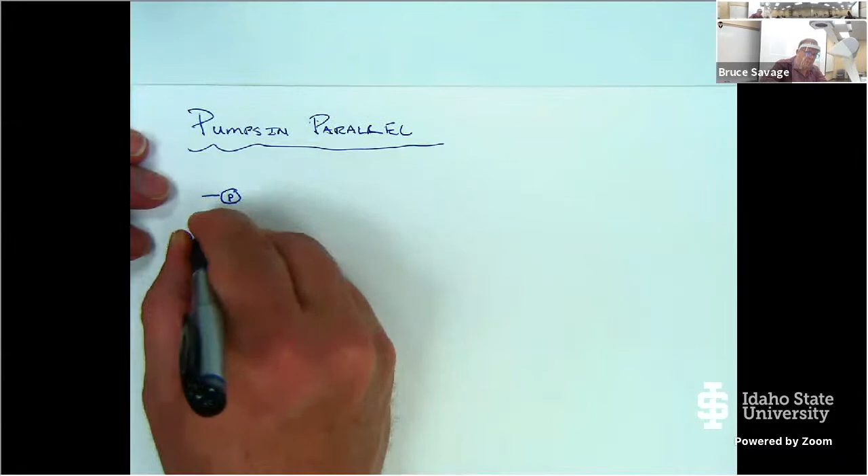Okay, yeah, so in other words, we're going to be doing pumps in parallel and pumps in series. And pumps in parallel, this used to be a whole lot easier back when civils had to take the electrical engineering course, which we no longer require because we've had to cut back the number of credits, and we talk about electrical circuits, but you may have seen it in physics. I have a pipe coming in to a pump and another pump, and then these two pumps come together and go to my system.

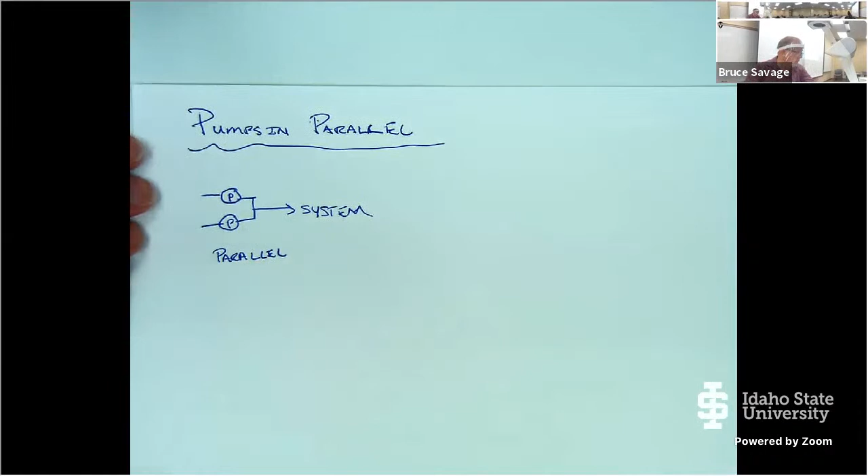This then, this is parallel. Okay. So, well, I want to ask this question to you guys. What is the obvious thing that we are doing with this versus one pump? When I say the obvious thing, if we're saying that the important things with pumps is the head and the flow rate, okay?

Relative to, so this system relative to that system where there's only one pump, which do you think is the most important criteria, the head or the flow rate? Or which one is affected the most? Let me say it that way. So once again, the two most important variables dealing with the pump are the head and the flow rate. If we have pumps in parallel, which one do you think is affected more, the flow rate or the head?

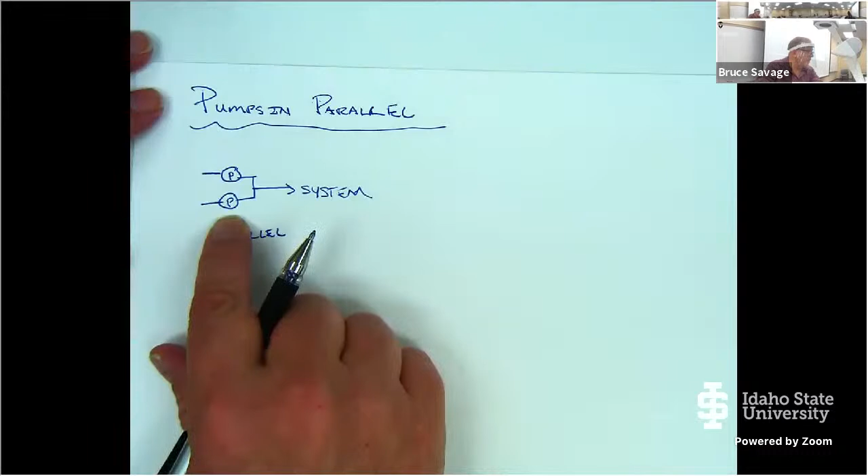Does this pump, does pump A, I'm going to call this A and this is B, does pump A know that pump B exists? It doesn't, does it? Now the system does. The system, when you add the flow to both, the system does. But that therein lies the key. I now have two suppliers to the system, two suppliers that are trying to give flow to the system. All right? So if they are supplying flow, now I have two people that's trying to bring flow to the system. So I probably did a terrible job of leading you down that path, but the goal I was trying to make here is that parallel pumps add flow.

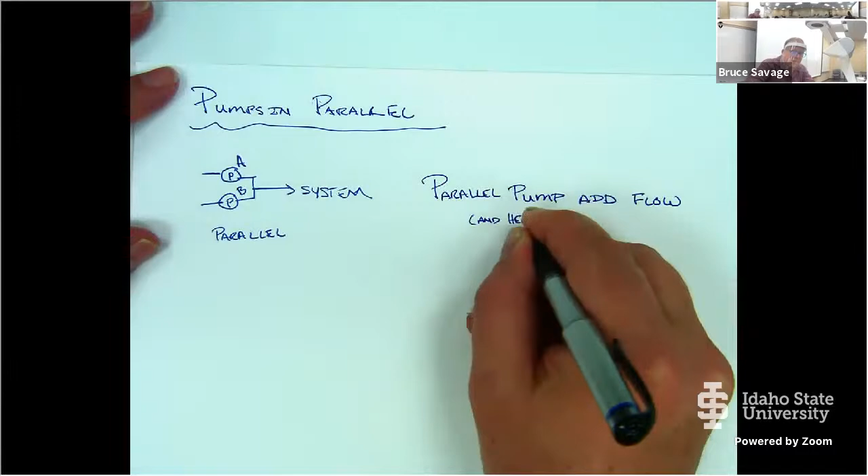My main goal here is that parallel pumps add flow. So if I'm in a system and I need more flow, and I don't necessarily want to change out my pump for a bigger one, there could be reasons why I don't want to do that. Two small pumps offer a lot of flexibility. They offer the ability to turn one pump on when I need it, turn two pumps on when I need more flow, and vice versa. So it offers a lot of flexibility. Or turn two pumps on all the time, and if one pump goes out, no big deal. I still have one pump, so I can at least get part of the flow.

So there's a little bit of a safety factor there, albeit at a lower flow rate. But there is... what's the word? Redundancy. Okay, there is a little bit of redundancy in my system.

If I absolutely need that higher flow rate, then I may put three pumps in and rotate between them if I always have to use two of them. The pumps in parallel add flow. So if you can burn that into your brain, it's going to help you solve this problem.

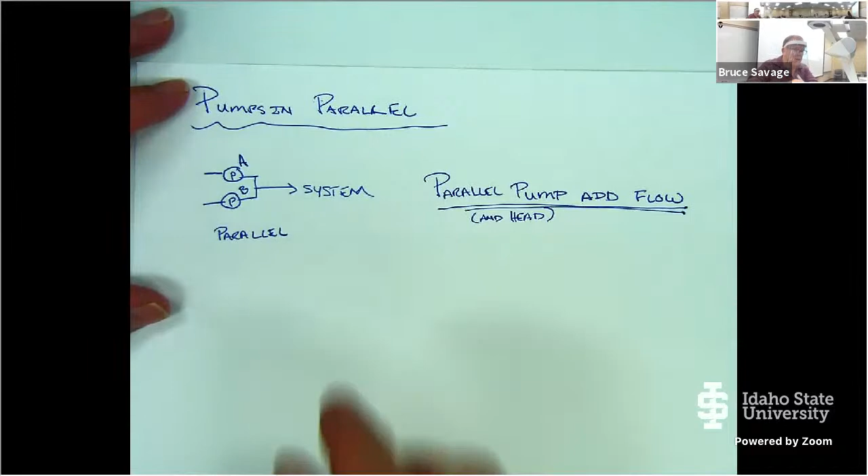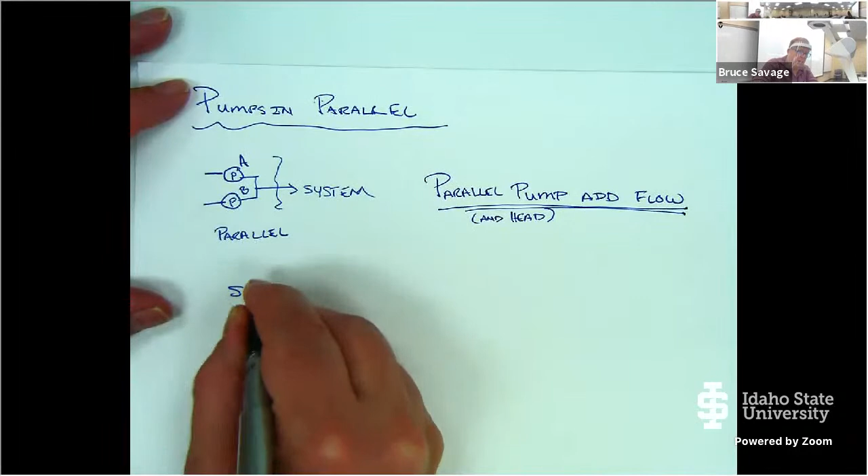Because our system curve does not change. After this, the system knows that there's flow coming to it, but it doesn't know that it's supplied by two pumps, or by three pumps. It just knows that there's flow coming to it, okay. So the system curve does not change.

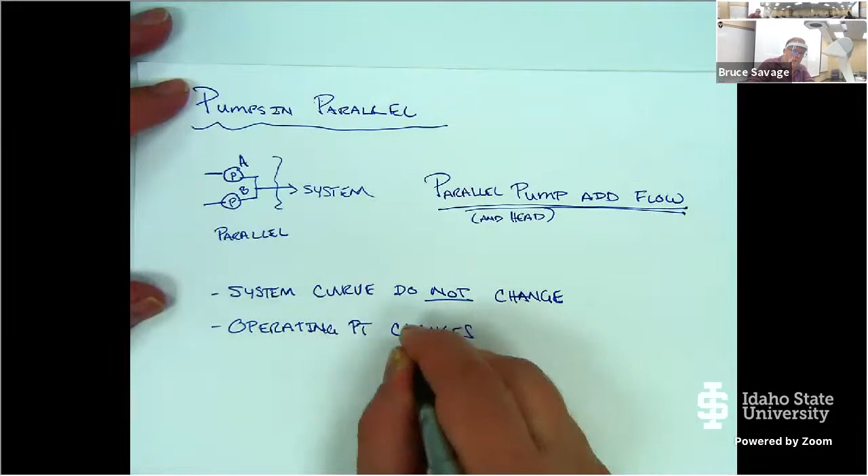The operating point changes. Okay, so the process, we add pump curves horizontally.

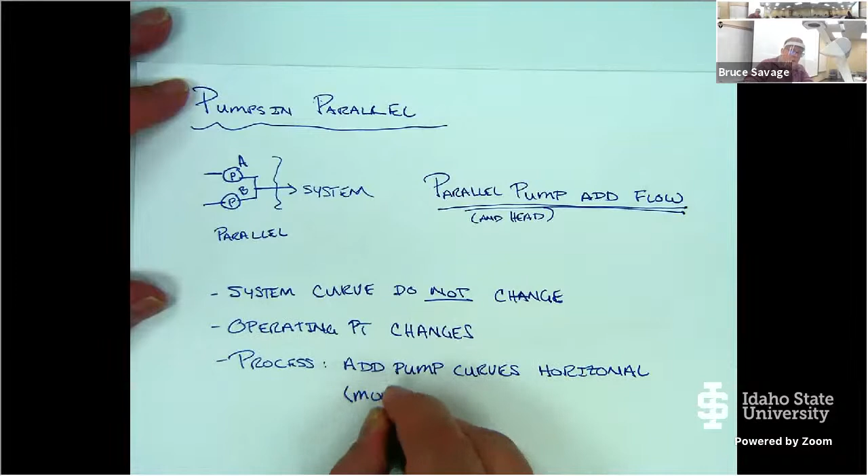More flow. So this is the concept, and I'm trying to tell you that pumps in parallel add flow. So you should say to yourself, oh, I'm going to add flow, so I'm going to go out on the x-axis. And we use then the principle of superposition.

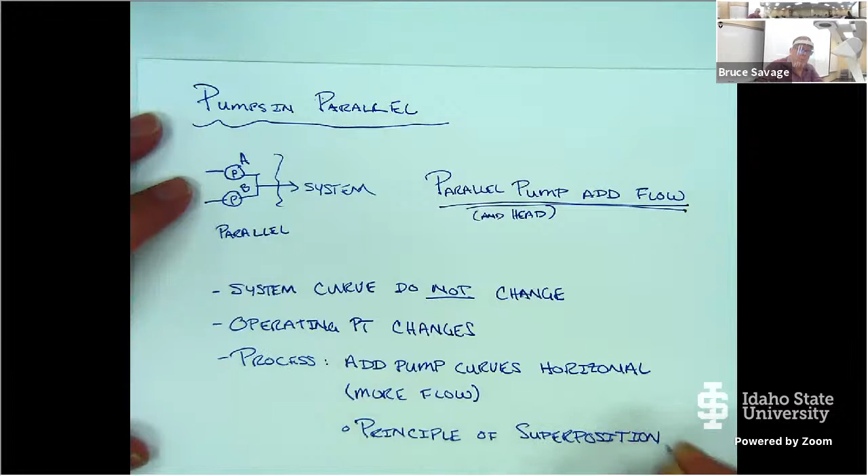You guys familiar with the principle of superposition? You should have seen it in probably structural analysis, sometimes in hydrology when you're dealing with groundwater. In other places in engineering, the principle of superposition means that we just add them together, right?

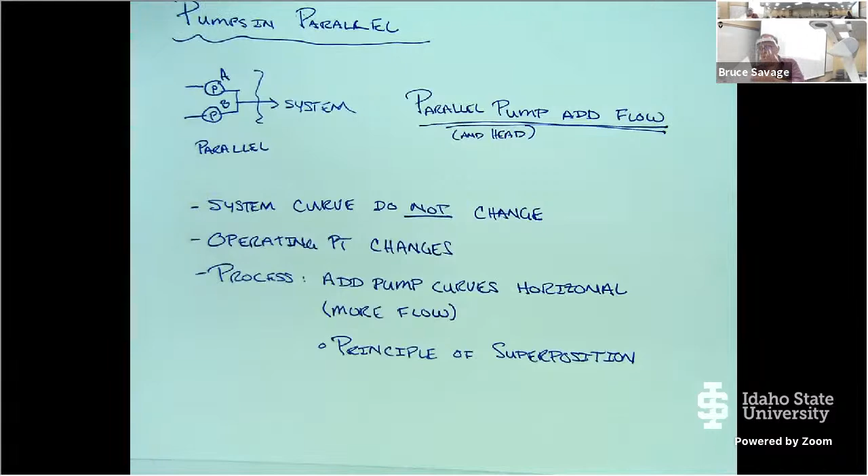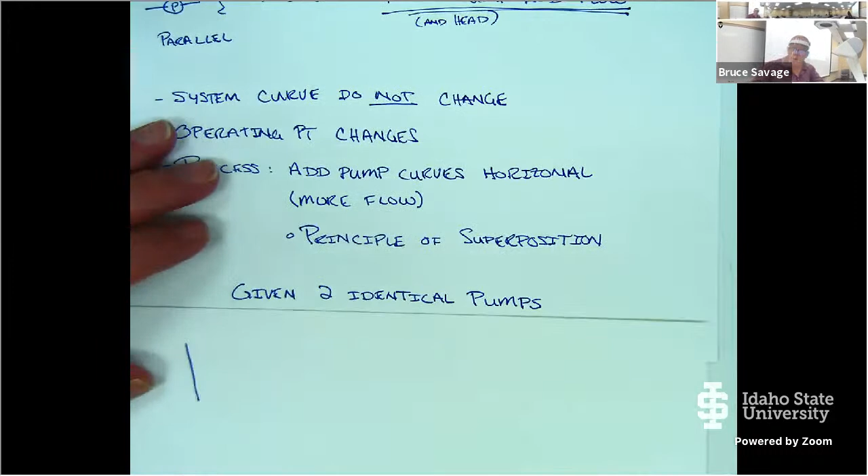So what this tells us is that if I have pump... okay, let me finish this out here. Say given two identical pumps, two pumps that are the same model, same motors, everything. So given two identical pumps, I then can take the one pump curve, so pump curve A,

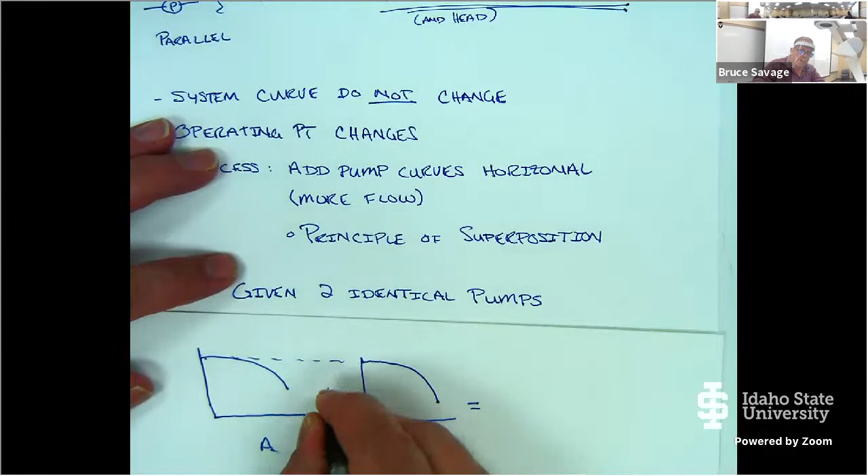and pump curve B. I'm going to try and draw them the same the best that I can. And now when I add those two together, then I'm going to get pump curve A plus B. I'm going to use a little line here to represent the head. I didn't draw those too well, but that represents the shutoff head.

So I'm going to draw pump curve A, and then I'm going to come in and add pump curve B. And that was terrible, I should have used my erasable pen. It should be up to here. All right.

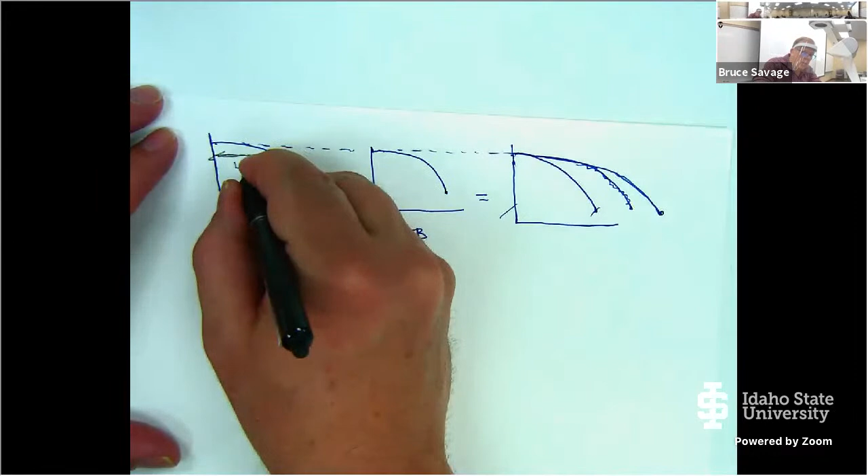Here's the concept. If I have this distance right here as L, call it L1A, and over here at the same height, I have L2A. What's the relationship between L1A and L2A? They're the same, okay. So now I'm just going to come over here to my combined pump curve. I'm going to put in L1A, and I'm going to come in and put in L2A. For similar pumps, same size and everything, those distances are going to be the same.

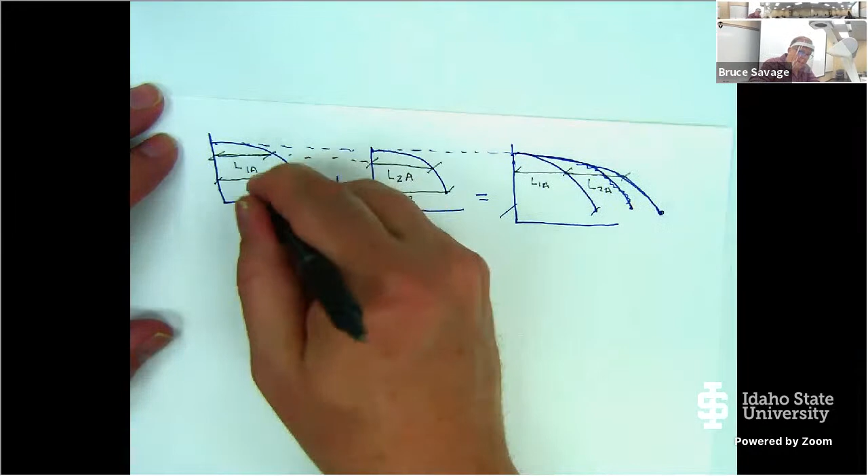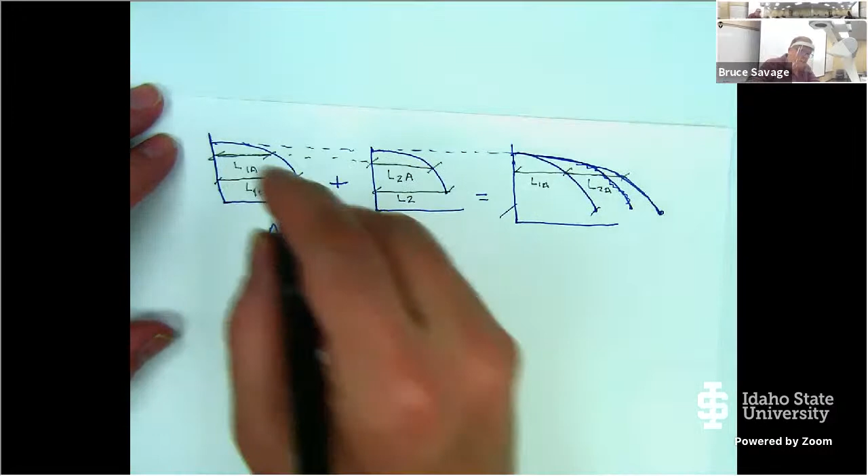And then I can also come down here to the bottom and put in L2A... sorry, the first one should be L1B, sorry. Monday, I'll blame it on Monday. L1B... oh, you've got those labeled as curve A and curve B, so wouldn't it be L2A? 2A, thank you, yeah, good thing someone's watching out for me. And over here, this is going to be L2B, right? And up on the top, that should have been L2B, L1B. Ah, how about I just go home and go to bed? All right, there we go. L1A, L1B.

And then L2A and L2B. I can put those in over here. Man, that was a terrible notation system there—I should have just called those A, B, C, and D, would have been a whole lot easier, right? Noting then that L1A is equal to L1B and L2A is equal to L2B.

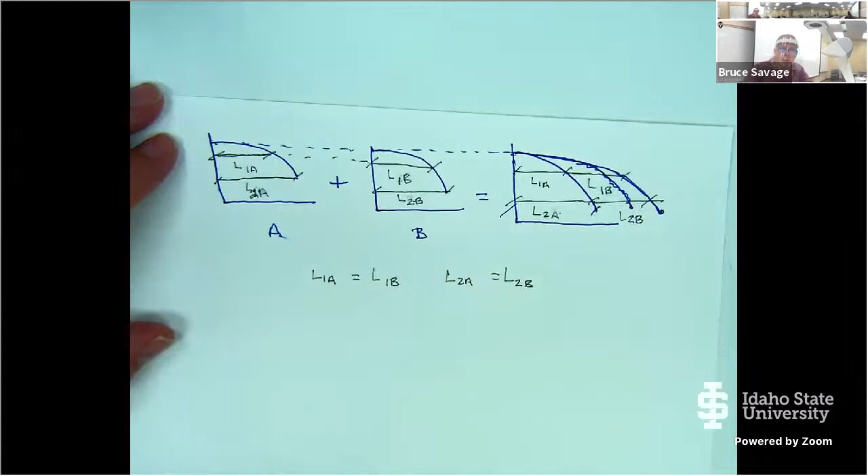Now, my little graph up here is pretty messed up, so I'm going to draw a new combined graph down here on the bottom. Make this bigger.

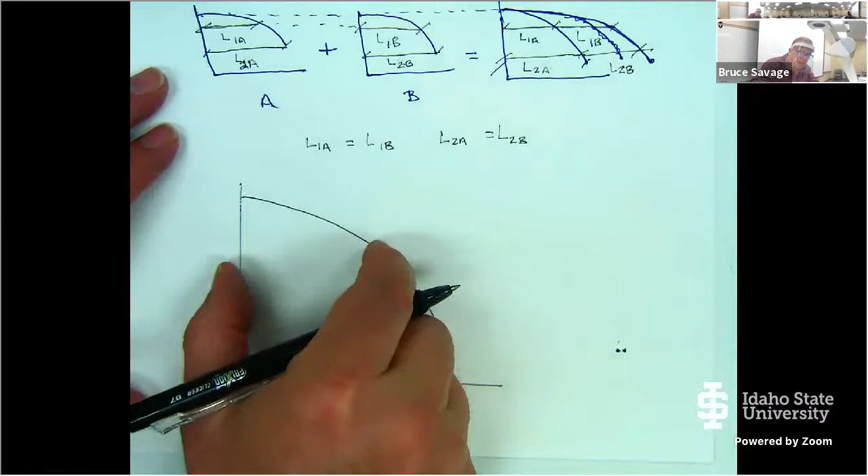All right, so if this is pump 1, just using my fingers here to measure approximate distance between each of those. So now I can draw my second pump curve. Of course, it comes back to the same spot because if you add 0 plus 0, you get the same value. So this is one pump. This is two pumps.

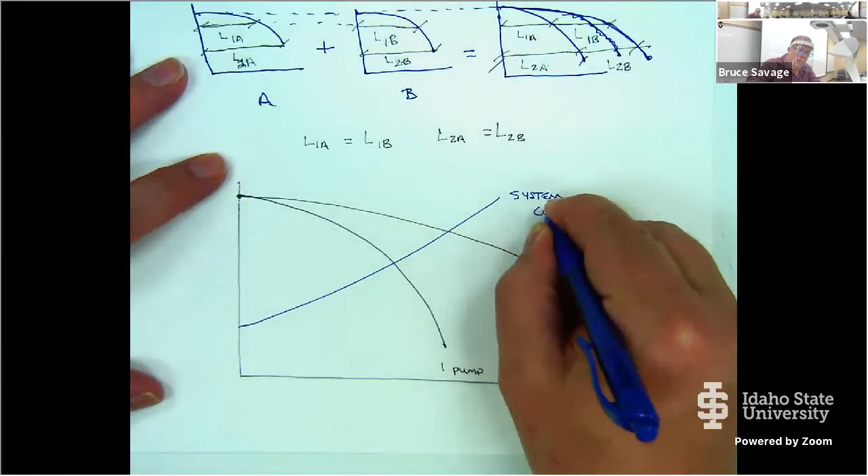Now, if I go ahead and put my system curve on, I'm going to draw a random system curve. Call this my system curve. And hopefully you can see that by adding another pump, my flow and my head increase, but it's mostly my flow that increases.

Let me bring my red pen today. My operating point—this here right here is going to be one pump. That pen's dead. One pump operating. And right here is going to be two pumps operating.

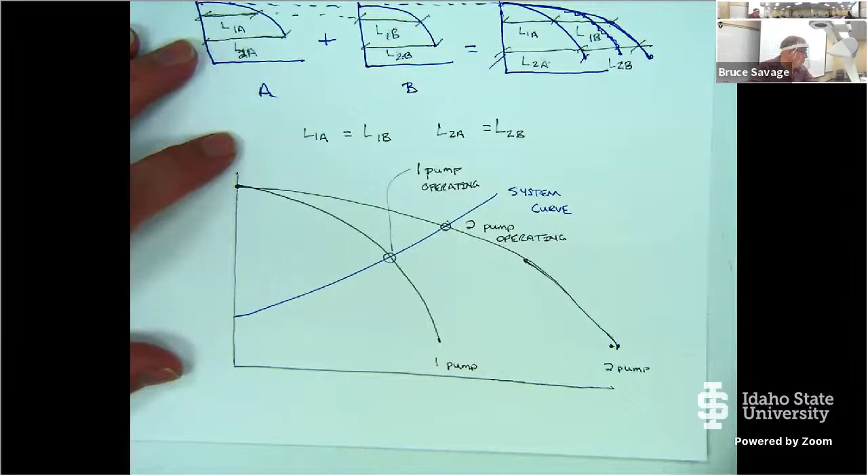So if I turn one pump on, it's going to operate right there. That's where the pump curve intersects the system curve. If I turn two pumps on, it's going to operate over here. Does this mean that the first pump is putting in this flow rate down here, and then the second one is adding to it? Does one pump know that the other one exists? It does not. And which pump would be putting in more? If they're the same pumps, wouldn't you expect them to put the same in? That makes sense, right?

So notice if I come back horizontally to one pump curve, now these two are essentially the same. So Q and Q, both of these pumps, since they're the same pumps, are going to put in the same flow rate because they're pumping against this head.

Since they're pumping against this head, each pump is putting in half of the flow. Because we're putting more water in our system, the friction losses go up. Our delta Z does not change—how high we're lifting the fluid doesn't change, but because we're pumping more water through our system, the friction loss goes up. That's why our system curve goes up, and that's why we don't double the flow from the first pump, but we do increase the flow. We don't double the flow because the friction losses go up. But each pump, since they're identical pumps, puts in the same rate.

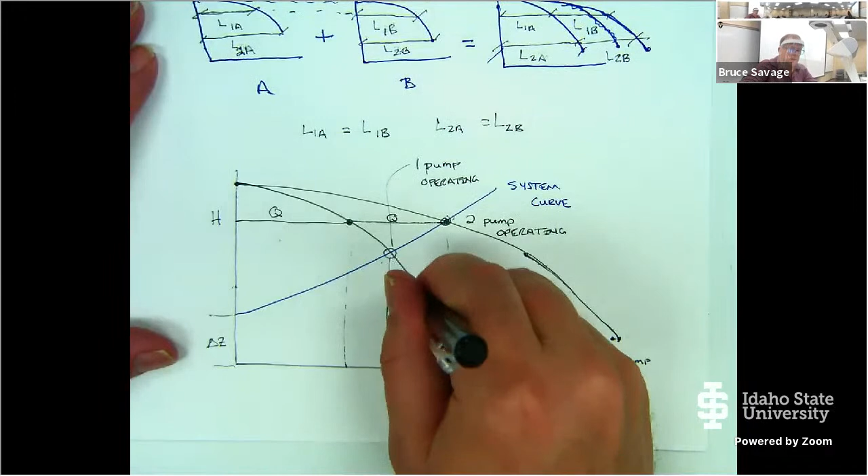So when we add those together, on a pump curve, we would go horizontally back across to get the flow rate for each one. It should be the same. At a given head over here, the distance from our y-axis to the pump curve should be the same distance as pump curve 1 to pump curve 2. Because that's the principle of superposition—add them together, as long as they're the same pump. As long as they're the same, that's the key. We'll look at dissimilar pumps probably on Wednesday, but as long as they're the same.

All right, now if I want to evaluate the performance of a pump, realizing that each pump doesn't know that the other one's there, what head are they operating at? This head right there, right? And this flow rate. So I would bring everything back to this point to evaluate my pump's efficiency and the net positive suction head.

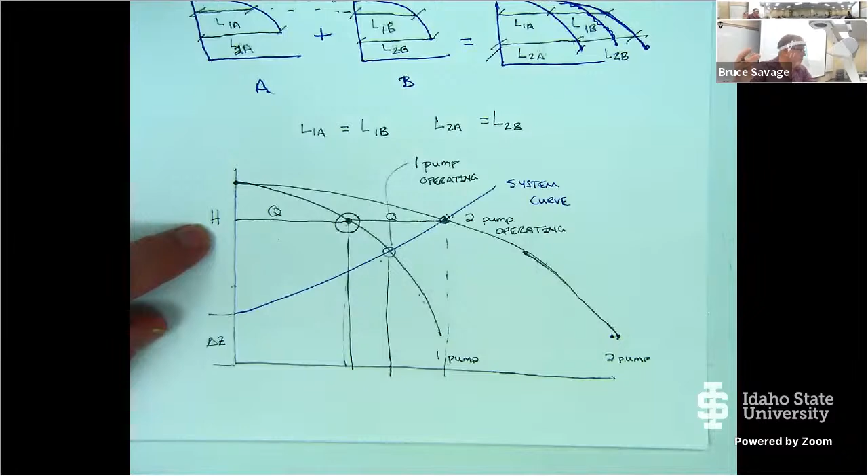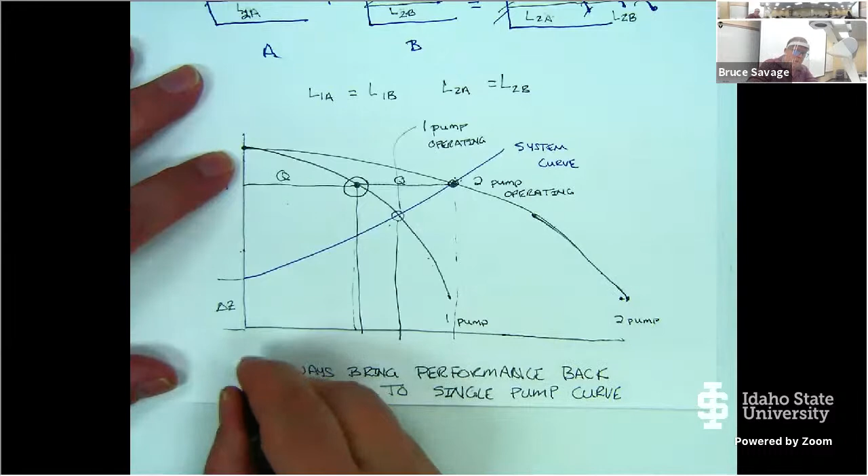So the key point here is always bring performance back to a single pump curve. Always bring the performance back to a single pump curve.

And because the pumps are operating at this head right here, we know that the flow is going to be half for each pump of the system flow. If the system has 100 gallons per minute, each pump is going to provide 50 because they're the same. And they pump against this head—that's all that pump knows. It knows it has to pump water against this head. It doesn't know what else is coming into the pipeline down system, but it knows if it has to pump at this head, this is where it's going to operate. This is my efficiency, this is my net positive suction head.

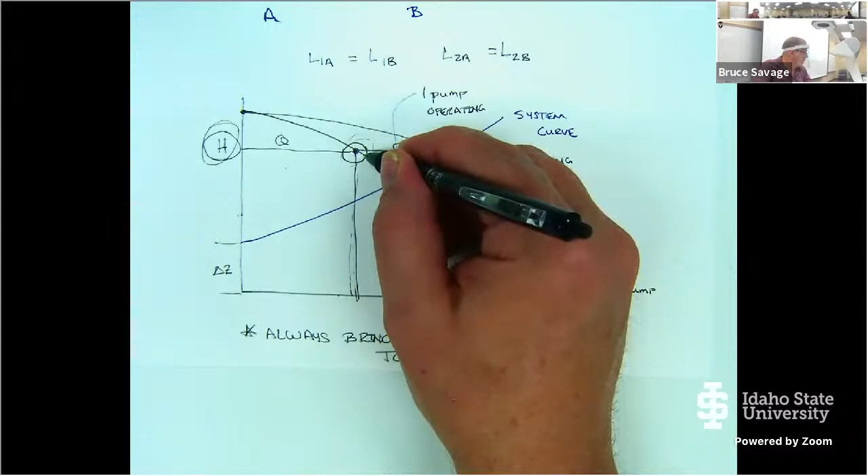Okay? Can you explain that again? So like, where is that relevant when you're doing a calculation that you would use that operating point? So this operating point is the operating point for a single pump in a system with two identical pumps in parallel.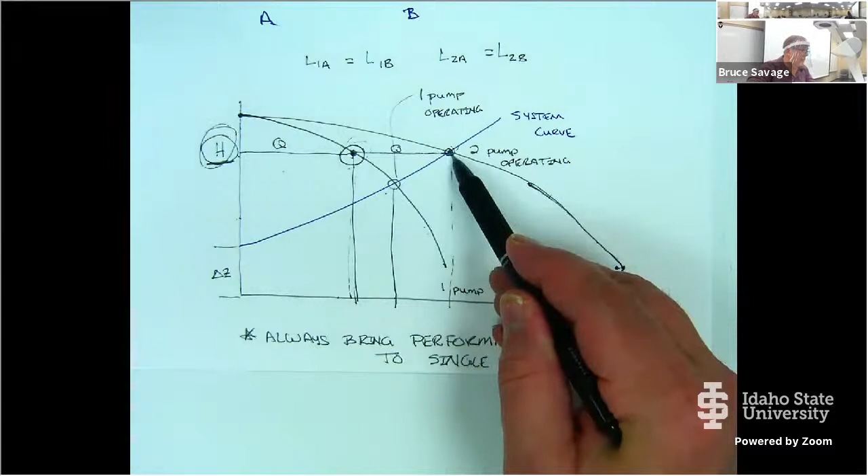Okay, this is the operating point for a single pump with two pumps in parallel. Now, if I had three pumps in parallel, but my system curve went through and I brought the head back there as well, that would still be the operating point. This is the required head for my system. In order to get flow to go through the system, I look at where the system curve and the pump curves intersect.

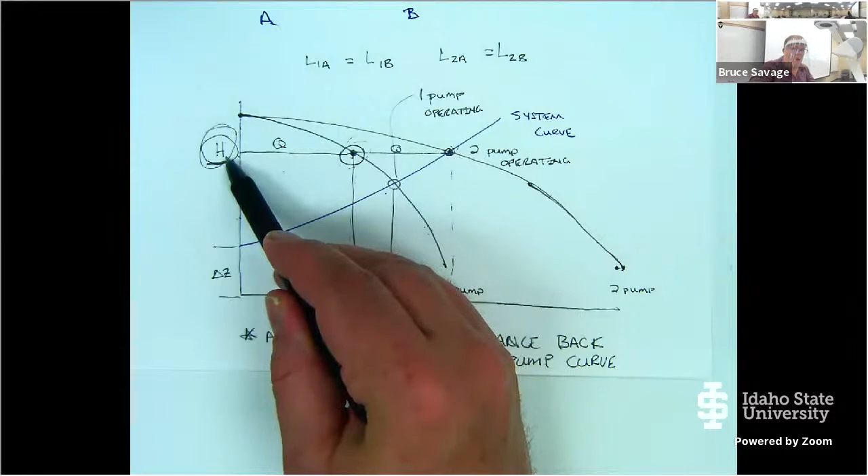I bring the head back, and that's where one pump is operating at. It's operating at that head, and that's all it knows. I have to push water against this head. How much can I push? I can push this flow rate right there.

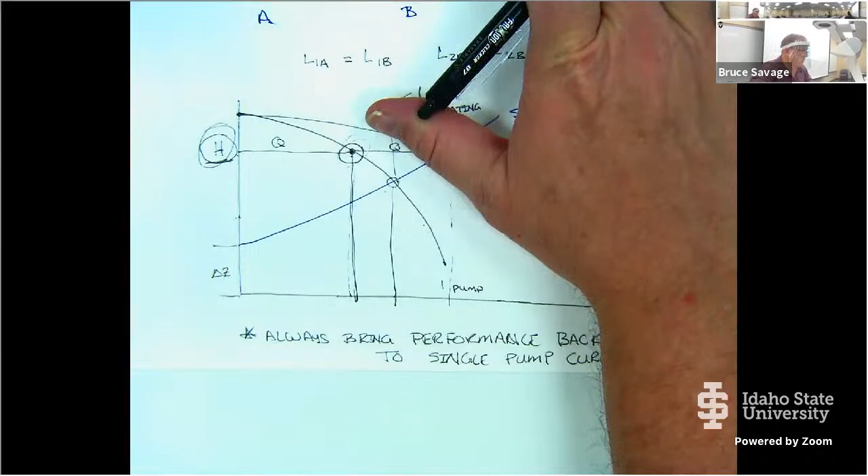So what's that circle, the little circle you drew, right here? Yeah, okay. This is for a pump, a single pump operating by itself. But then that one's for the single pump in parallel with that? Yes. So this is one pump, and the pen didn't mark it very well up there - one pump. And this one up here is two pumps operating.

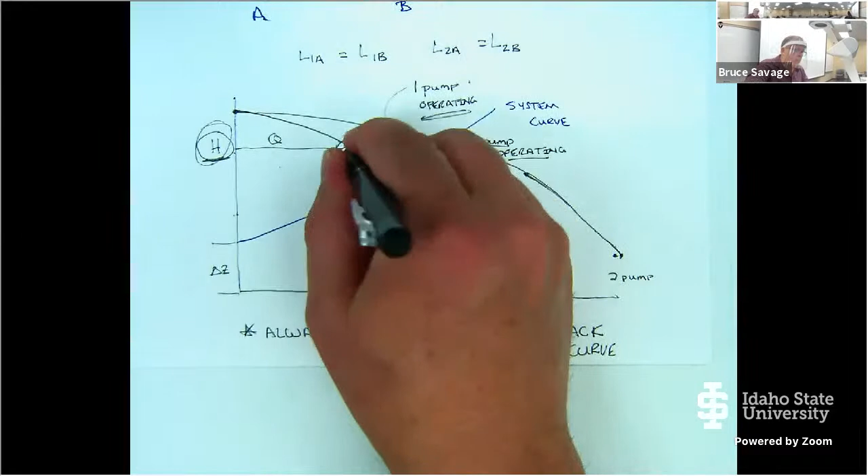But when the two pumps are operating, we have to go back along the head curve to see where the single pump is operating at, because that's what it's pushing against - that head. That would be how you find the flow of a single pump, find the efficiency of a single pump, and find the net positive suction head of a single pump.

Okay, all right. So we're finding... Hey, Dr. Savage? Yes. So this only works with the two pumps being the same? Otherwise, you would have to go back and look at both of the pump curves individually. Correct. Yeah, if we have dissimilar pumps, which we will talk about after we've gone through the basics here, you would have to go back and look at each pump with the same head that the system is operating at.

Okay, and that's the key part, is the same head. The pump only knows how much head it's pushing up against. Laura? So if you are looking at the graph with two pumps, and then you go over and find that head, and it's the same as for just one pump, well, it's higher, but then do you use the flow rate that you find from one pump or two?

You use the flow rate from two pumps, but you have to split it in half, which takes you back to here. One pump can push this much, but when you throw another pump on there, because the friction loss increases, it can't double the flow. It doesn't double the flow because of the increase in head right here, this delta H.

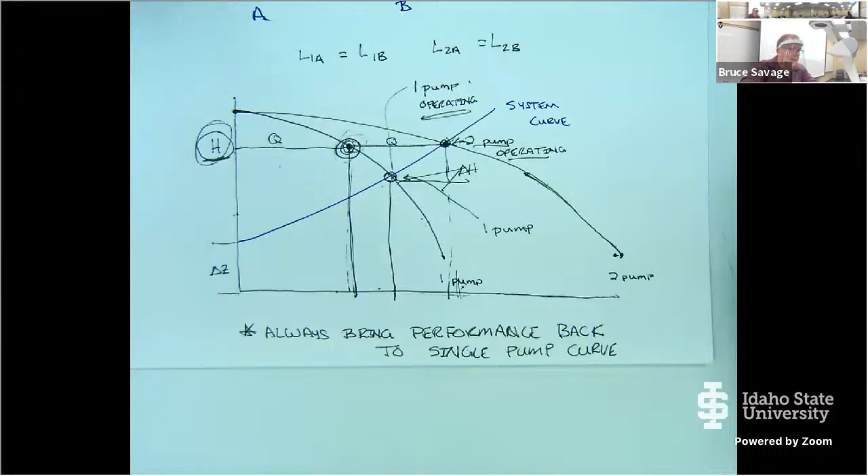Okay, so you come back across here to find this operating point right there. Oh, gotcha. So you'd say the first pump uses a different flow than the second one? Or do you use the same flow? The first - if they're operating together, they have the same flow rate. If one's operating by itself, we turn one pump off and only operate.

So if we only turn on one pump, our system comes to equilibrium, it's going to be pumping this right here. Then we throw the other pump on, and it's going to go out to here, but the amount of flow coming from pump one reduces back to here because it has to increase the head that it's pushing against. Gotcha. Okay, those online, any other questions that you may have?

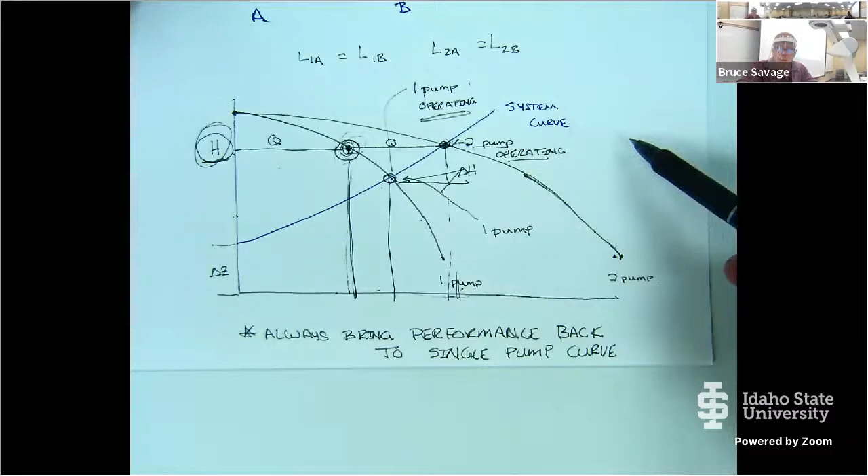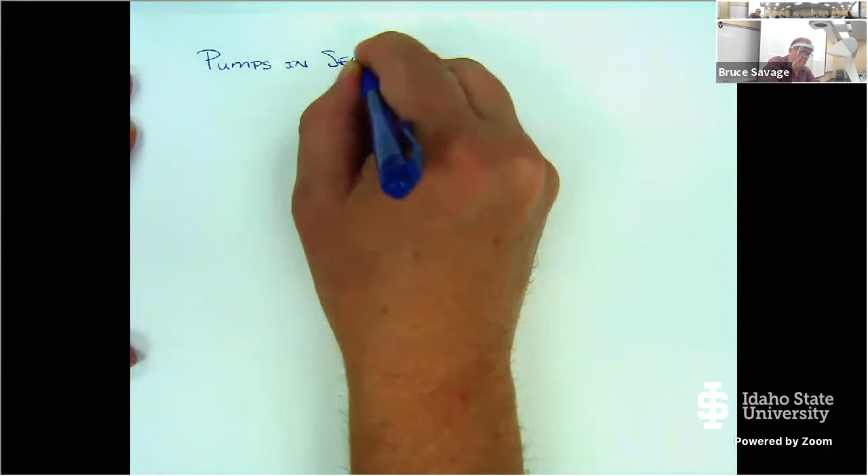Okay, let's talk about pumps in series. Pumps in series is where you have a line come in to a pump, which then supplies another pump. And I'm going to put two in there, but you could have more.

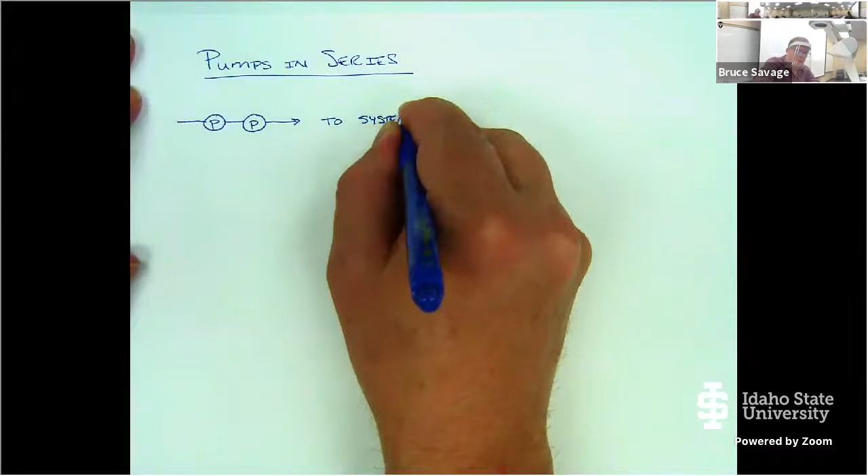Okay, and a little caveat here is always use the same size.

Now with parallel, we don't have to use the same size, but in series, can you imagine pump number 1 pumping 100 gallons per minute and pump number 2 only being able to pump 50? Would it be a restriction? Yeah, it would be a restriction. And if the reverse is even worse, if pump number 1 can only pump 50 and pump number 2 can do 100, now you can't supply enough flow. You're going to create low pressures and you're going to cavitate.

So, if you really get into pumps, they may change them like 1 or 2% due to some losses, but you want them essentially the same.

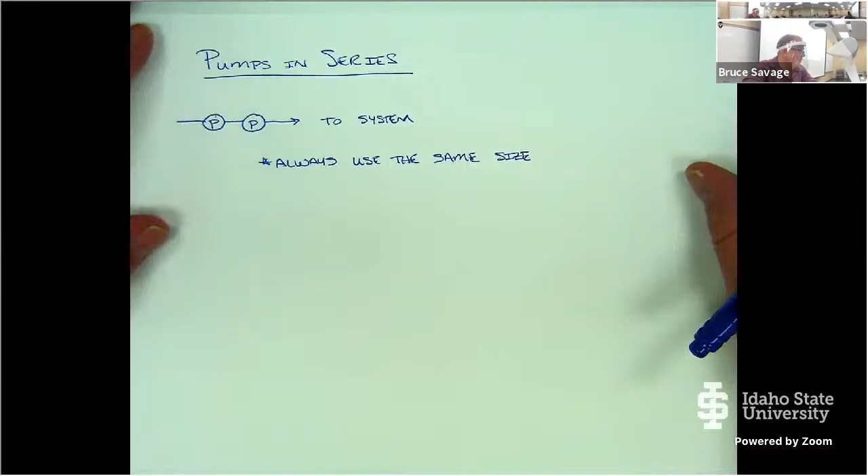Okay, so this should be a hint. The flow rate's the same. What's the advantage of adding a second pump? Adds additional head. Adds no additional flow, it adds additional head. So pumps in series add additional head. Flow stays the same.

Now this is pretty common. A lot of times they'll put pumps together, the pump themselves, like the pump impeller. And one pump impeller will feed into another pump impeller, which will feed into another pump impeller. They call them stages or bowls. So if I'm 600 feet down trying to get water out of a well, trying to design a pump with a single impeller that can pump 600 feet is pretty tough because of the tolerances. The amount of tolerances you have to have so the water doesn't slide back around the impeller at that kind of a pressure is very, very tight, so it costs a lot of money.

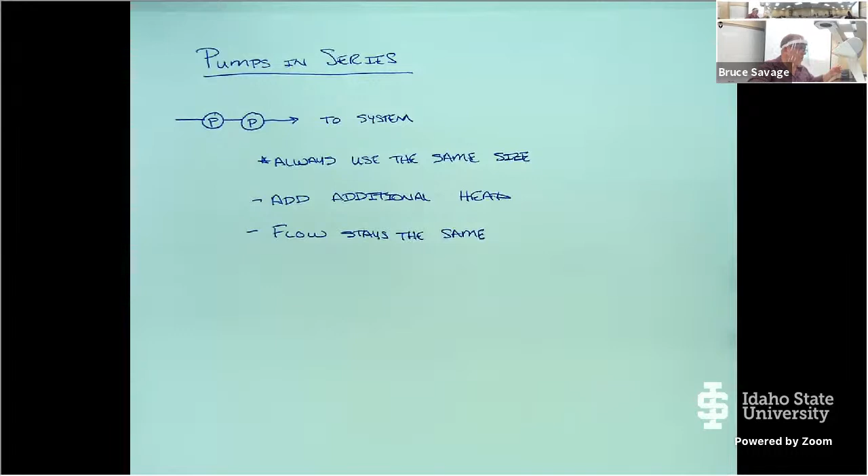But it's not so hard to put 6 pumps that do 100 each together, and you can even put them on the same shaft and use a single motor to drive them. One impeller adds 100 feet, the next impeller adds 100 feet, the next 100, next 100, next 100, and so on up to 600 feet. So each pump's only adding a small amount, but they are cumulative, they add on each other.

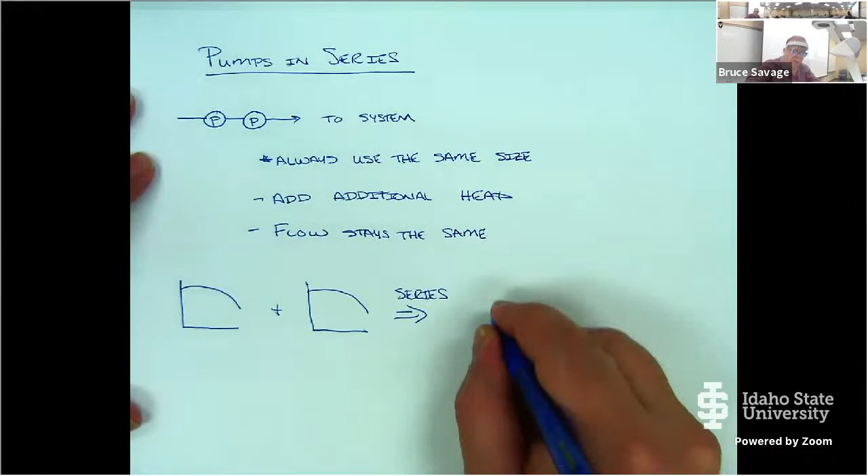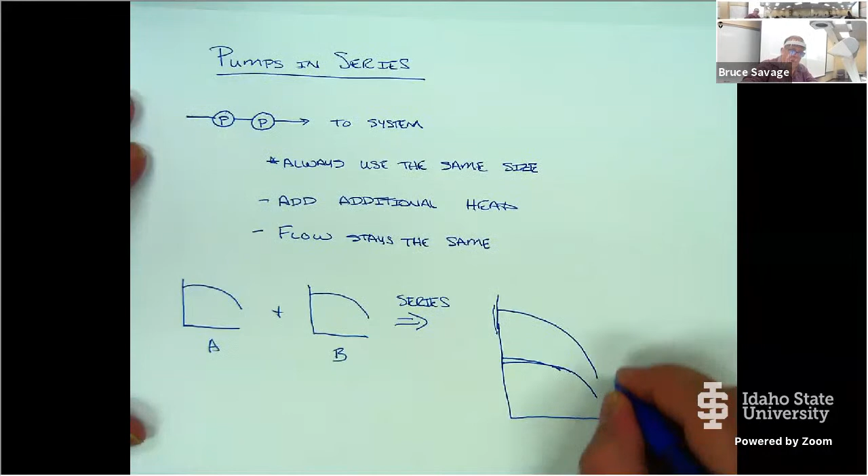All right, so now, if I'm trying to take this pump curve and add it with this pump curve in series, since we are adding head, and it is the principle of superposition -- whoops, that's a terrible pump curve -- we are going to go vertically and add them up. So pump A, pump B, over here we have A, we have B. Let me do the same thing. Let me draw a bigger picture.

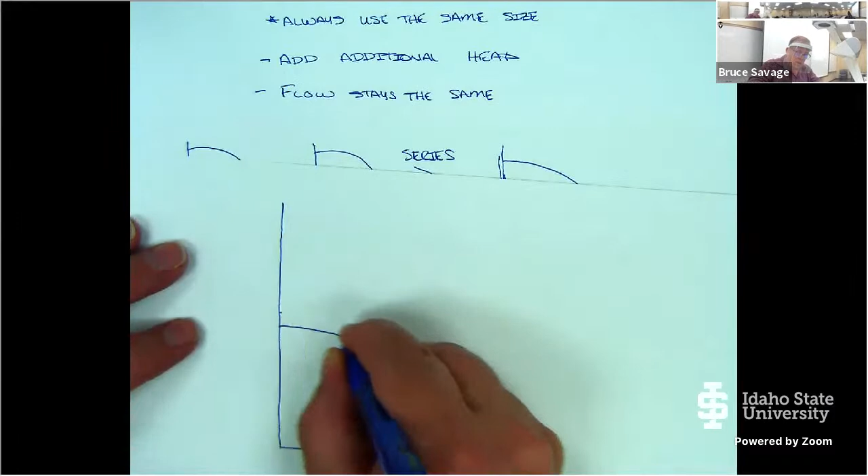So here we have flow. I should have notated my axes. So here I have a single pump curve, and I want to add it in series. So I look at this, I have H naught going up to the top right there, right? And so when I add one more pump, I'm going to come up another distance of H naught, and that's going to be 1 point. Then I'm going to come in and find a point down here, and we'll call this H sub A, and I'm going to take that and physically add it on up there.

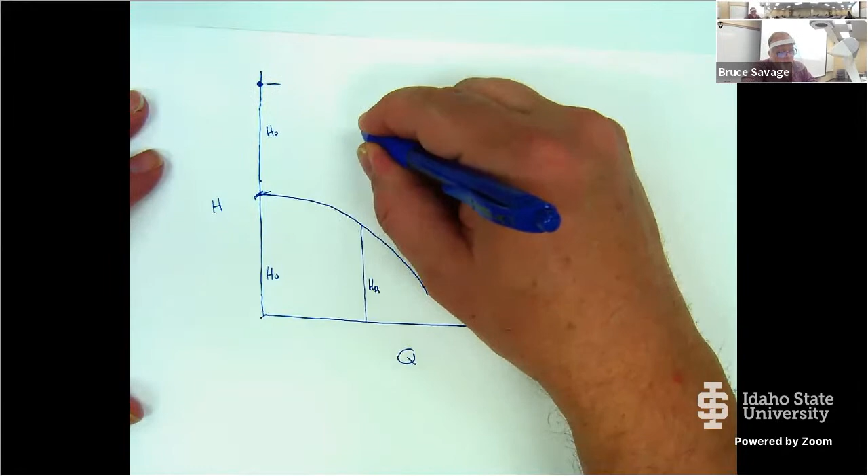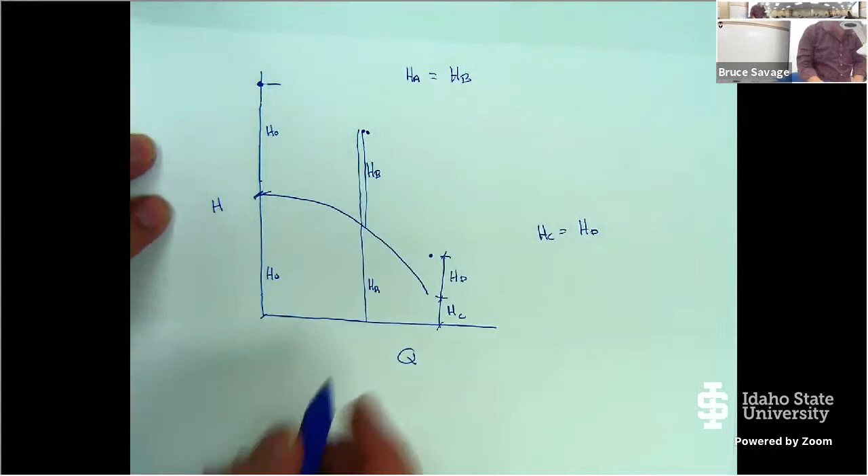You get the concept that this right here, H sub B -- so we know that H sub A equals H sub B. Those are the same, right? And then I can do the same thing down here. This distance down here, add that up there. And so if this is H sub C and H sub D, H sub C equals H sub D. Those are physical lengths. So now that I've got my 3 points, I can redraw my pump curve.

So whereas the bottom one is just pump A, the top one is A plus A, or A plus B, however you want to look at that. So when you're graphically doing this, remember we said you need 3 points to do a curve. So I just grab 3 random points, measure, add it on top. So it's just like parallel. Parallel, I take a horizontal line and add it out this way because I'm adding flow. In series, I'm adding head, so I take a vertical line and add it up. Take 3 points, draw my new curve in.

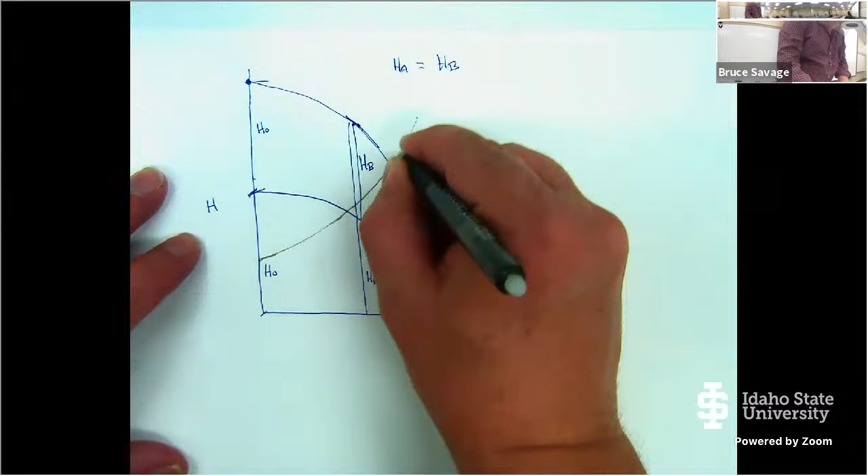Okay, now if I took my system curve, whereas I would operate right here at the intersection for one pump. So this is -- and my pens, I get new pens here -- this is one pump. And where the system curve and the 2 pump curves interact, that is, this is 2 pumps.

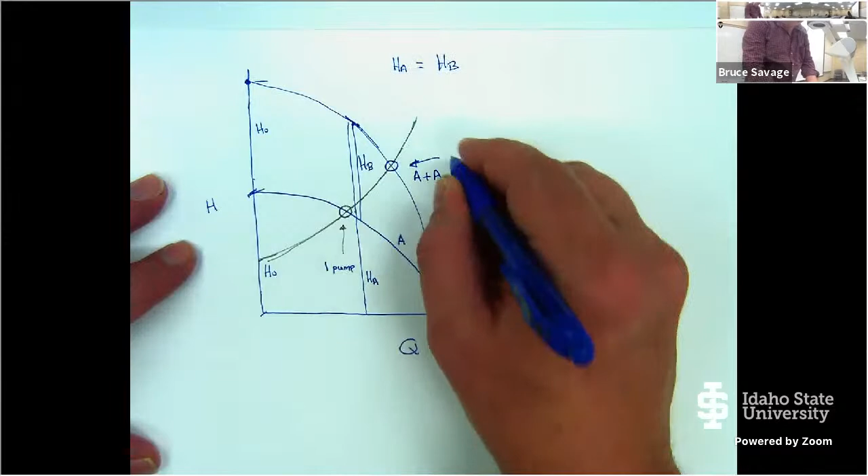Following the concept that we use for parallel curves, if I want to find the performance of one pump, what do I do?

Straight down from the 2 pumps, so you meet the first pump line. Excellent. I find out at what head is one pump operating at. I'm going to come straight down and note that this point right here, that's where the pump is, where the single pump is going to operate in a 2 series pump configuration.

Let me say that again. This little spot right there that I've drawn, tried to put an X through, that little X point right there, that's the location where a single pump in a 2 pump series configuration will operate. And it's going to be half the head of the 2 pump configuration, which makes sense. Pumps in parallel are half the flow, pumps in series are half the head. One pump provides half the head, the other pump provides half the head. And just like the pump in parallel, always go back to a single pump curve to evaluate the performance. Always go back to a single pump.

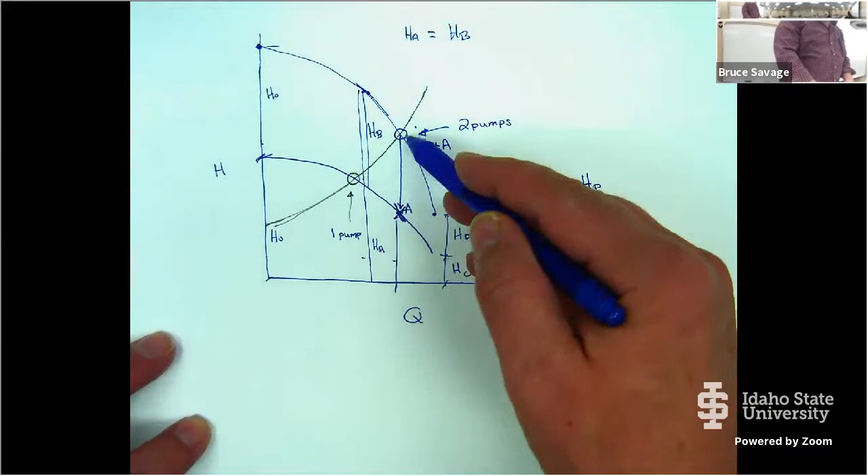Now, if I had some method of turning only one pump on, let's say my pumps were separated by a small piece of pipe, and I had a valve where I could redirect the flow. So if I only needed this much flow rate and this much head, I'd just turn on one pump. And then if I needed additional flow and head, by adding another pump on there, I would turn on the second pump and it would increase the head and increase the flow slightly from only having one pump. Because now I have 2 pumps trying to pump the flow, I'm splitting the head between them, reducing the total head that each pump has to pump against that system curve.

So Lauren: for the series, since it's adding head, that's why we go vertically down? Yes. But then for parallel, you're just adding flow, we go horizontal. Yes. Or you could ask the question, at what head is this pump operating at, and that answers both questions. For parallel, you have to go horizontally to bring the head back to a single curve. And for series, you have to come vertically to bring it back to the head for a single pump curve. But it's all based on the head. Get the correct head, and then the flow rate will fall out.

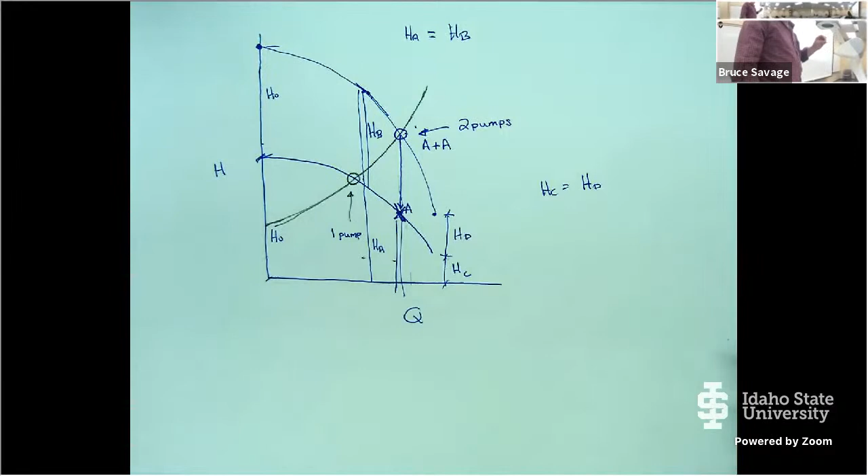Depending on your system curve and the steepness of the system curve, if you're in a situation where you believe you need multiple pumps: if you had a relatively flat system curve, you gain more benefit by adding pumps in parallel. And if you had a very vertical or steep system curve, you gain more benefit by adding them in series. Correct, that would be a valid statement.

Laura: Do all the pipes have to be the same size, like in diameter and length? For pumps in series, do they have to be? No, but if the pumps are the same, it would be a good idea. I mean, would it still perform? In series, I think you'd have problems. But I would also note that most of the pumps in series are connected at the pump itself.

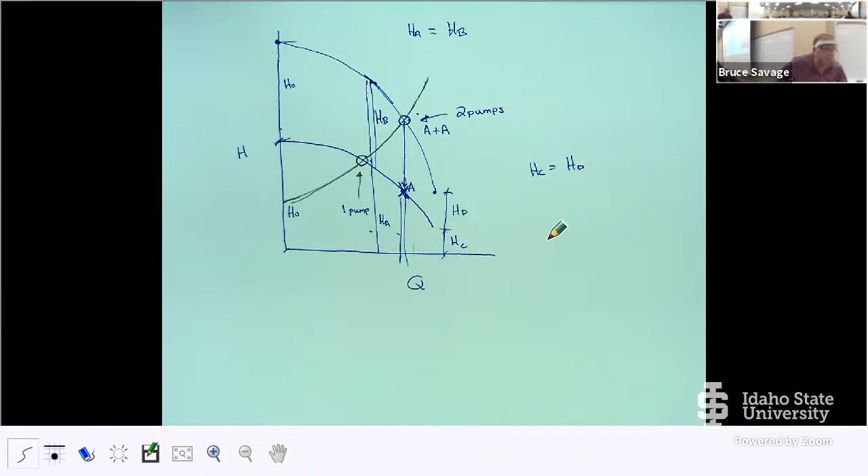Okay, so I have this system here. We want to evaluate the system curve for the system shown below, and determine what pump or pumps will do the best job. Then we'll show the work on the pump curve on the next page. It's not showing it, though. That's weird.

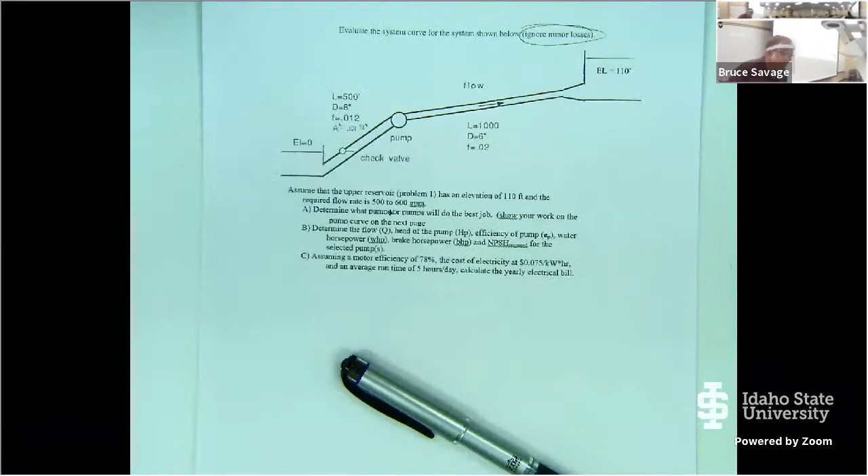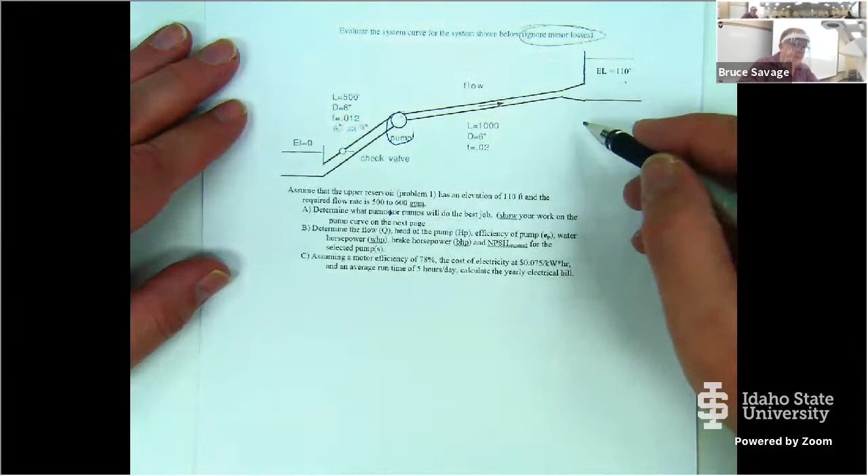Don't know why that was, but here we go. Okay, so we've got a short little section going up to our pump, and then we've got the line going up to our other reservoir up here. We want to find what is the correct pump to stick in there to get this system to work, and our goal is 500 to 600 gallons per minute.

Okay, now we could work through this and note that I did say neglect the minor losses, so we don't have to worry about the check valve, or entrance or exit losses. And if you work through this, you should find for your system curve...

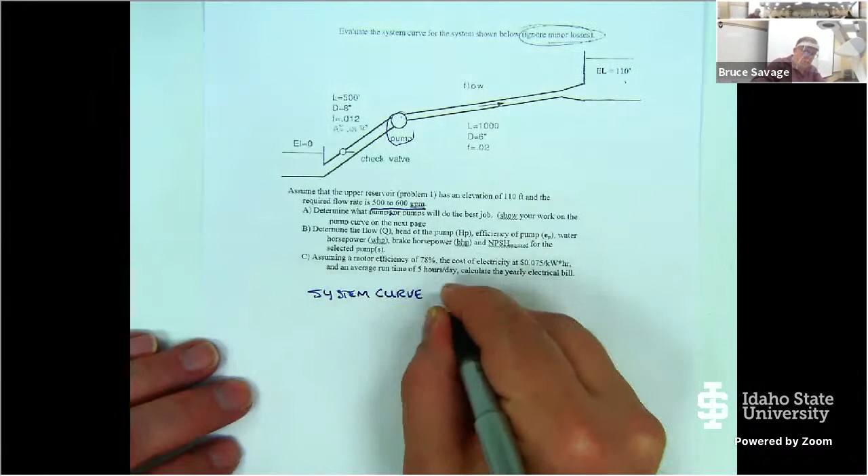...that the total dynamic head is equal to 110 feet plus 17.26 times Q squared, where Q is given in units of cubic feet per second. So C is equal to 17.26.

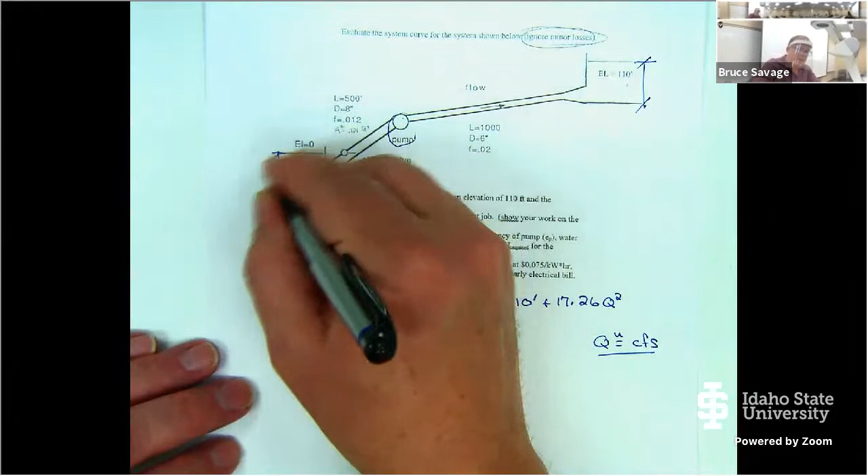So you're familiar with that, right? Let's just check here. We're going from an elevation of 0 up to an elevation of 110, so delta Z is then 110. That makes sense, all right? And then once again, if you check friction loss in both of those pipes, that's what you're going to get.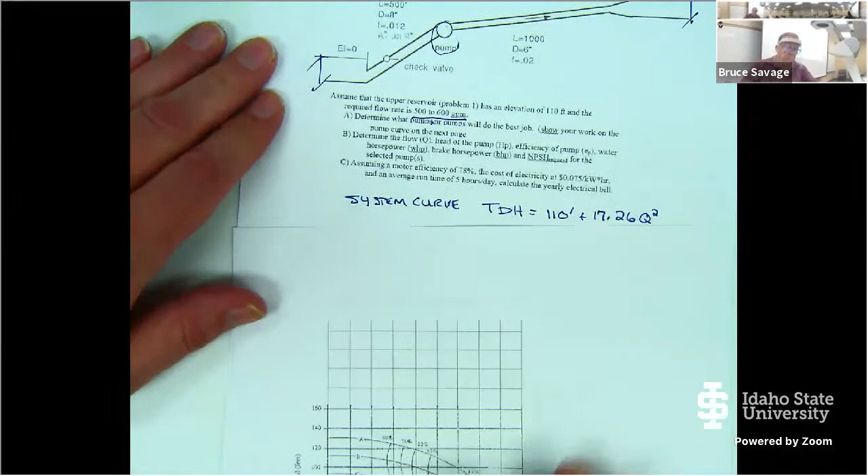So now I can go ahead and take that and put that on the system curve—sorry, on the pump curve. So I come over to my pump curve. Now let me bring my pump curve over here. I want to put this on the pump curve. So my first point is going to be right here at 110 when there's 0 flow.

Okay, and I look at that and I say that to me doesn't look like I'm going to get much flow, because my pump curve, no matter how flat it is—and I know it's not going to be that flat—for me to get 500 gallons per minute, it's really not going to make it. So my gut feel is that I'm going to need pumps in series to add more head to get this to work.

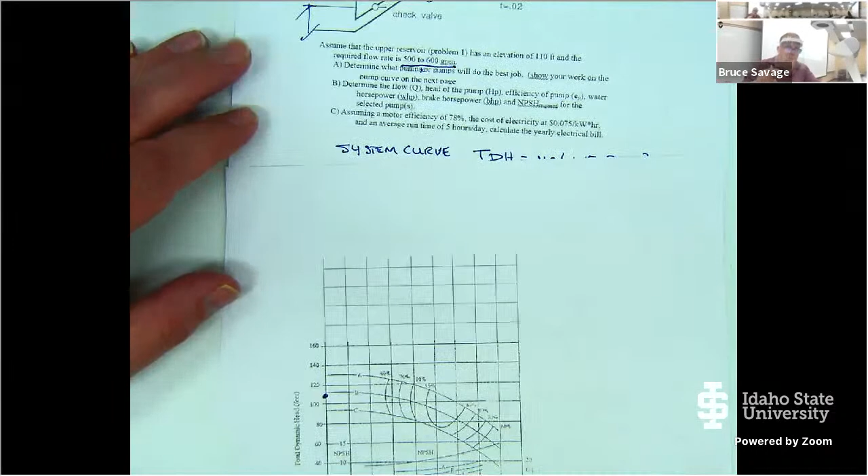Okay, and I didn't need to define—well, first off, let's get the system curve on there, and this will make that more obvious. So I first need to build my system curve, at least 3 points for my system curve, right? So I'm going to come over here and I'm going to say Q in gallons per minute.

And that's going to equate to Q in cubic feet per second, and then I can go ahead and calculate what the H is for the TDH, total dynamic head, in terms of feet that I need to add to my system. So if I have 0 gallons per minute, that's going to be 0 CFS, and that's going to be 110 feet as expected by sticking 0 into my equation.

Okay, now I'm going to pick 400 gallons per minute. 400 gallons per minute is going to be 0.89 cubic feet per second. I plug 0.89 into my equation, and my head then is going to be 124 feet.

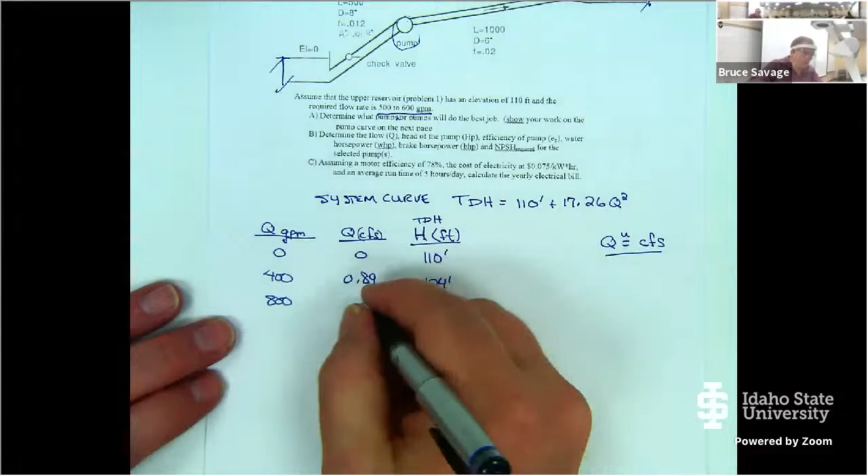And now I'm going to pick 800. Okay, 800 is going to be 1.78 cubic feet per second, and when I plug that into my equation, that's going to tell me 165 feet.

All right, come back to my pump curve over here. Okay, 0, 110, it's pretty simple. All right, 400—at 400 gallons per minute, I need 124 feet, so I'm going to come straight up here. There's 120, there's 130, I'm going to split that difference, and here is 124.

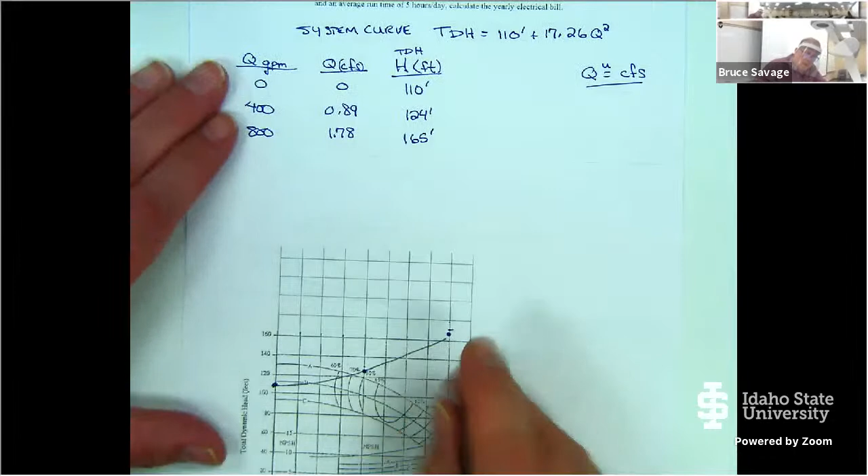And then I'm going to go out to 800, and 800 is 165. So I'm going to come up here, and here's 160. The next one would be 180, so 170, split that difference, and it's going to be right down there. So now I have my system curve. I can draw my system curve on there, best I can. That's how my system is going to operate.

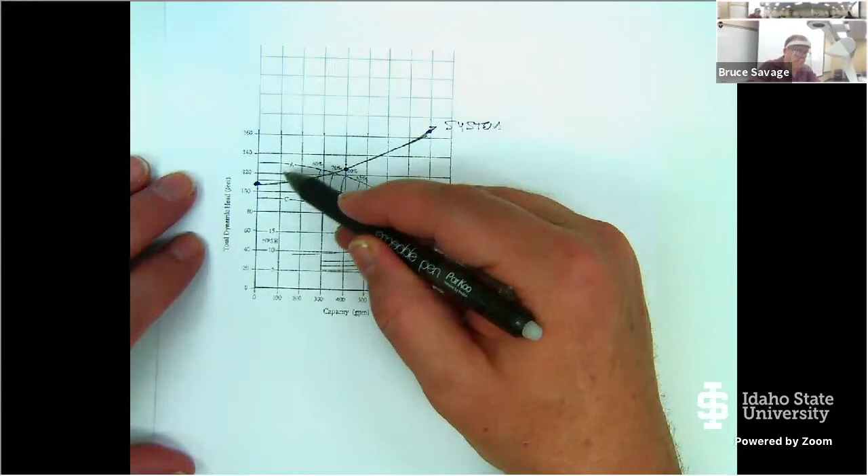Okay, if I was operating with just pump A, I'd have about 350 gallons per minute. Not going to cut it. If I was operating with B, I would get maybe somewhere in the order of 150 gallons per minute. If I had impeller C, I would get no flow, or it would actually run backwards, except I have a check valve in the system, so I get no flow. But I want 500 to 600 gallons per minute.

So I know I need to add pumps in series. Now I could plot A, B, and C on here. In the interest of time, I'm going to go ahead and use C. So we want to use C plus C. I'm going to come over here with C.

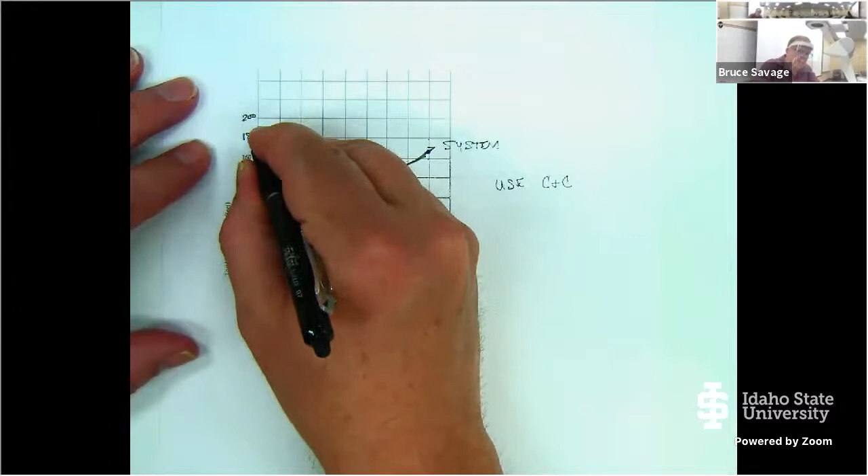I have about 90, 93 shut-off head, 93 feet of head. So that's going to take me up to 186. So this is 180, and this is 200 up here. 180, 186 is going to be somewhere right around in there. That's my little point.

Okay, I'm going to go ahead and pick right around 400 again. But now, to make my life easy, I'm going to pick where it crosses the horizontal axis here. So vertically up here, I'm going to add 80, because that's where that C line crosses the 80 feet of head. And so I'm going to come vertically up, and 80 is going to be 160. So I'm going to put in another point right there.

I'm going to double it. So right here, you see I'm working on the C line again. So whereas this is 80, I'm up to 160.

Okay, and then one more point. It doesn't quite go to 800, so I'm going to pick 700. And at 700 gallons per minute, I'm about at 50 feet of head. So I'm going to come up to 100, and put my point right there.

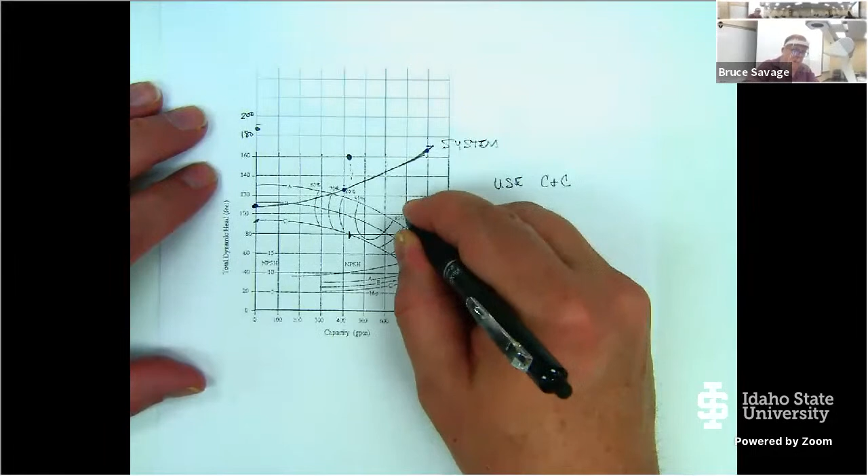And now I have my three curves, and I can draw my combined pump curve of that system.

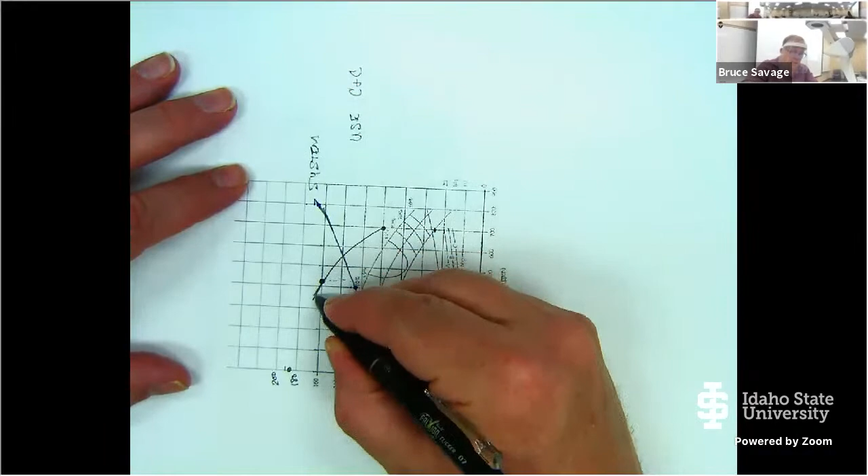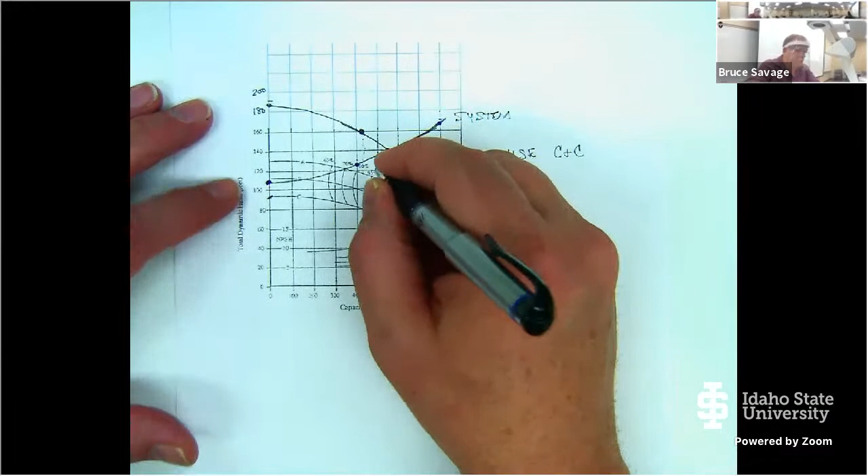Okay, we're out of time here, but really quickly: now I know that my pump curve for two pumps in parallel, C plus C, and my system curve intersect right there. So now I'm going to come straight down and find where that intersects with a single pump, C plus C, and that's where the single pump operates right there. Single operation - not a single pump by itself, but a single pump in parallel.

And now I can get all the information about how much head one pump adds, how much flow one pump adds, what is the net positive suction head. I can get all that information from one pump curve, and I can go back and solve those other questions: what is the pump horsepower, what is the brake horsepower, what is the total power, how do I calculate the energy. You've done all those already.

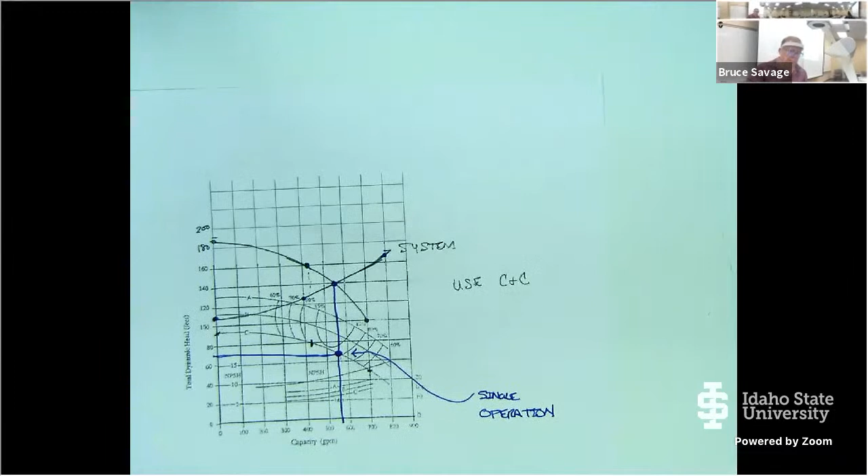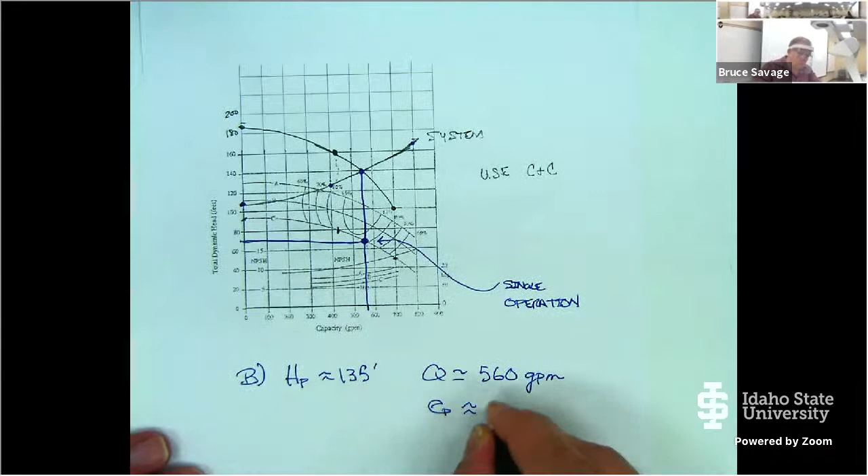So really quickly, if you want the answers: B, H sub P is approximately 135 feet. Q is approximately 560 gallons per minute. The efficiency of the pump is approximately 82%. Net positive suction head required is 12 feet. And then I get water horsepower equal to 19.1, brake horsepower equal to 23.2.

And then the total power - I didn't calculate the total power. I did that as part of the total power cost. Oh, I guess I did. The total horsepower then is... oh, that's not right. Oh yeah, it is, 22.24 kilowatts. I changed the units. And the total cost of operating this is $3,044 per year.

So those are the answers to that. I appreciate your patience, we're out of time, but that gives you an idea how to go through an entire problem like this. Remember: parallel, add flows; in series, add them vertically - add the pumps' heads.